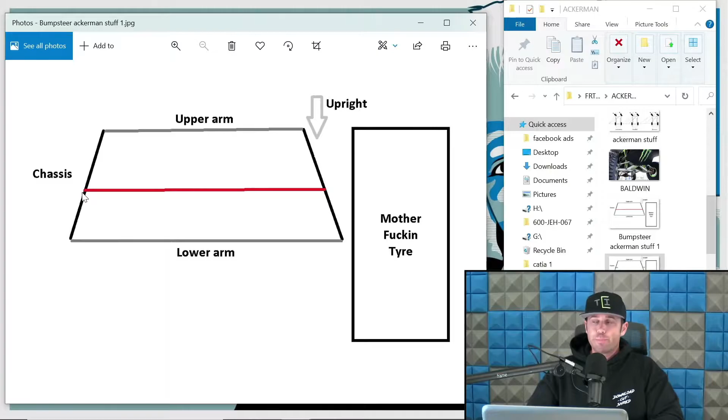So we're looking at the red dots here, which is that right there. That would simulate our steering linkage, steering arm, tie rod arm, whatever you want to call it — the thing with rod ends in it that holds the upright to the steering mechanism, whether it's a rack or swinger system. So right here is it, basically on the inclination and that imaginary line.

That is theoretically the best spot to start if you're doing this by hand, per se, to calculate your bump steer or toe curve mitigation. Yeah, let's use that one, in an appropriate manner relative to your geometry. We're just going to focus on staring at it head on right now. So that's like a good generalized starting point, or initial setup.

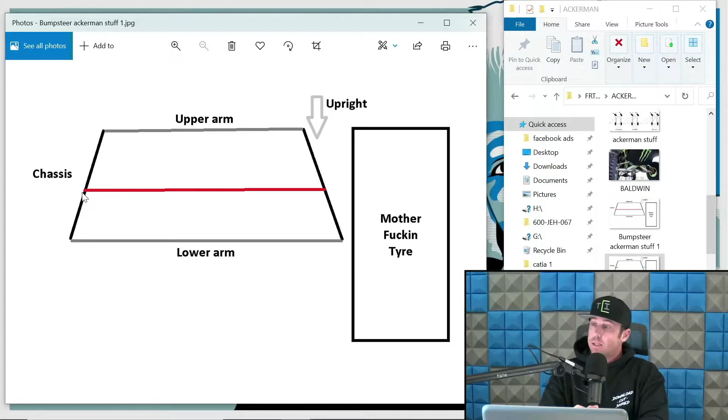And we're going to get more complex than this, so let's dive in. Let's dive into Ackerman. I've mentioned this before, and it's one of those things misunderstood by some, not fully understood — there's a lot of talk about Ackerman with some very opinionated metrics, and also a lot of debate in off-road as to whether it even matters to some degree. I'll tell you my thoughts on it here in a moment, but let's review what Ackerman is.

I found this diagram online, I don't know where the fuck it came from. I thought it had a stamp on it so I could give them credit, but it doesn't. So let's just say that I made this — you know, fucking plagiarizing.

But we're going to call this — well, in off-road, I like to think of this a little different than road racing, etc., because it's not fair to apply the same sort of calculations and predictions with Ackerman that would be in a road car relative to off-road. I don't think that's a fair comparison for two reasons.

One, we have like 10 times the travel of a road race car. So right out of the gate, as soon as you start moving this shit around, everything gets fucked up — all of it. So there's a reason why it's hard to have predictable calculations as you would in a road race car, per se.

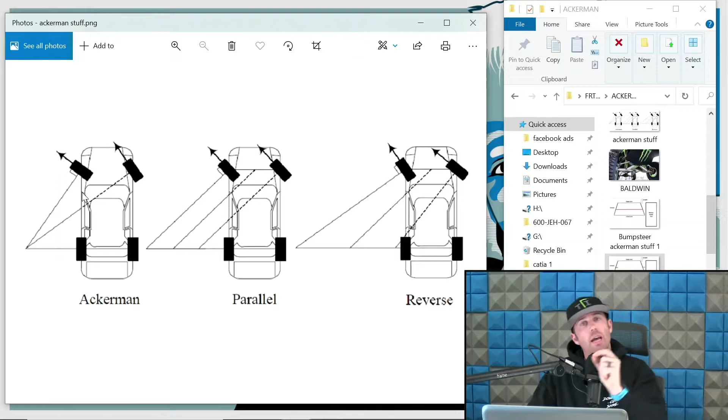And so that's what we have here on the left. If you look closely, that would be what we call Ackerman. Zooming in, look at this.

I am really getting this podcast shit down, bro. I don't even need a Jamie or a Jack. Well, maybe Jack — Jack definitely has to come back for the Ultimaniac episode.

But anyways, so that is a perfect example. That one right there looks like a decent amount of degrees, like 8 or 10 degrees. And so that's what I'm referring to — when I say an Ackerman of 2 degrees, that is the specific metric I'm using.

So now that we got that out of the way, you understand moving forward what I'm getting at when I state specific degrees with Ackerman. It's ride height, full lock, interior tire degree relative to exterior tire degree. It's a good way of noting what it is in an off-road truck, because all the others are so cattywampus anyway, and we'll get into that too.

Now, let's go over what parallel is. I mean, it's exactly what it sounds like — the tires move in parallel.

So the Ackerman at that would be 0 degrees by my definition, or the way I would talk about it with clients. So 0 degrees is that. Simple as fuck. Now let's talk about some real awesome shit.

Reverse Ackerman, or what I will refer to as negative, so to speak, i.e. I am having the outside tire now turn sharper than the interior tire. And there's definitely cases to be made for this. So there's a lot of debate and discussion in this stuff. There's a valid case for some reverse Ackerman in a rear steer type of chassis as well.

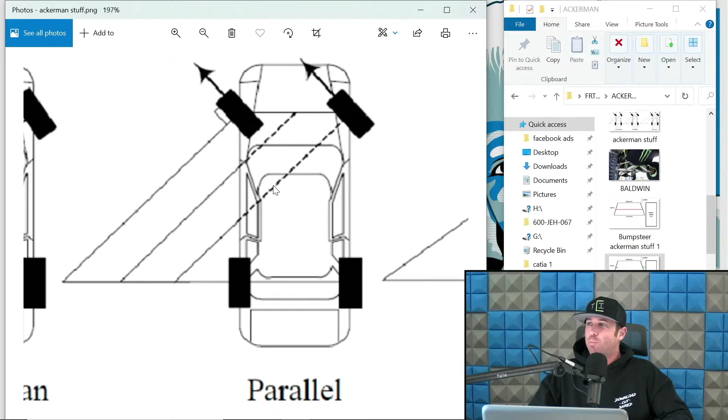And now you're going to start getting into far more advanced stuff than we're going to dive into tonight, primarily because I'm trying to focus on the front end. On the rear end section, when I get to the rear end stuff, we will dive into some of the rear steer based trucks and applications, because there are some, and some guys are very opinionated in that, they fucking hate it. And some guys definitely like it.

So again, different strokes for different folks, but what we can get from this completely stolen diagram is that when I am referring to Ackerman in a specific degree, i.e. if the degree is positive, that means the interior tire is turning faster than the exterior. If it's 0 degrees, I am referring to parallel. And if it's negative, I am referring to reverse Ackerman, which means the outside tire is now turning faster than the inside tire. So those are just a very good way of looking at it, and a good way that I have found about explaining to clients and dealing with clients in this situation.

And most of the guys we deal with, they're not even asking these questions per se. We've definitely had some, and it's more that more experienced guys are usually either concerned with this or just want to know, or they have a recommendation, or they have a specific measure they want us to adhere to. So, yeah, again, it's something cool, and we'll dive into some more. So that right there is the general concept with turning variance and Ackerman.

So now let's talk about building Ackerman into the system. And there's 2 ways to do this that can kind of work in symmetry, or they can fight each other. I kind of touched on this in the Volume 1 episode, and I didn't touch on the other aspect of it. And what that is, so...

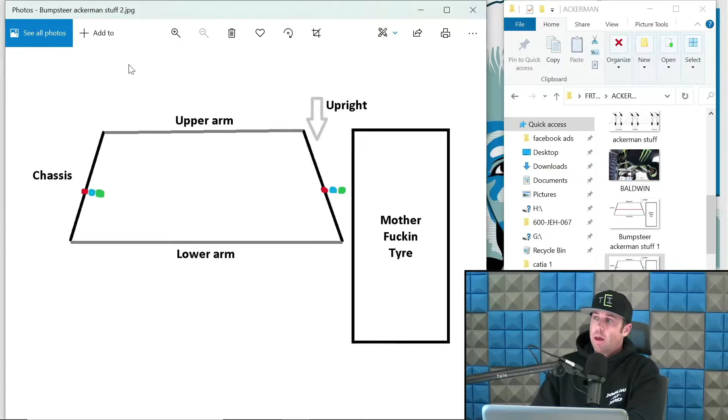So, as I move that point on this guy right here, as I move this point outboard of the inclination angle, looking head on the vehicle, we also have to mimic that on the interior side, or you're going to find that you're going to be forced to mimic that. Otherwise, you're going to start getting that cattywampus toe curve. That shit's going to be fucked. So, as I move further out, we're going to end up with more Ackerman. We're going to end up with steeper degrees of turning in that diagram I showed you. So that is one way for adding Ackerman into the system.

Now, another way would be... let me pull up... start. Here we go. Would be this.

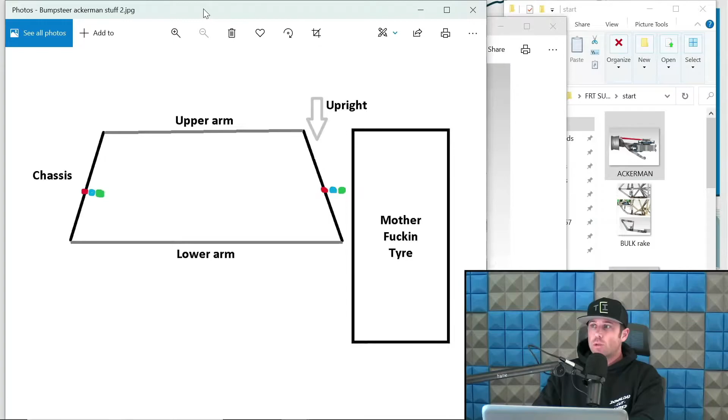Now, there is definitely a lot of debate in what is correct with these three metrics. So let's review some real quick.

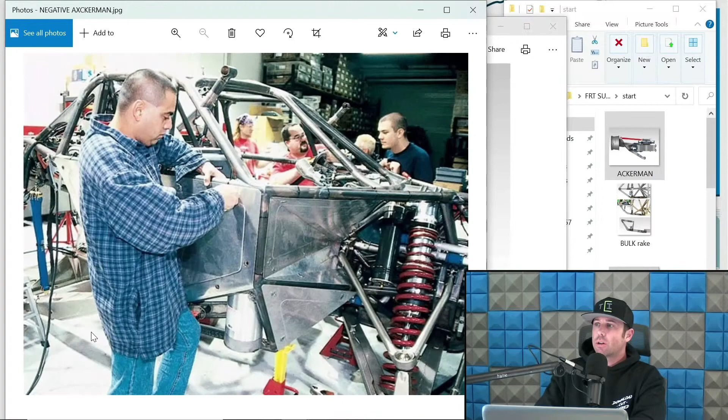This is hard to tell in this one. This is previously, before Robbie cut this truck up and made it into the Unicorn - you can see how far forward the steering rack is in this, and the angle of the steering arm is actually the inverse of what I just showed you in this CAD file. Whoa, that is incorrect, right here. So his rack is basically up in this area of the chassis. We're just reviewing some differences, and then I'll go into what this stuff means in a second.

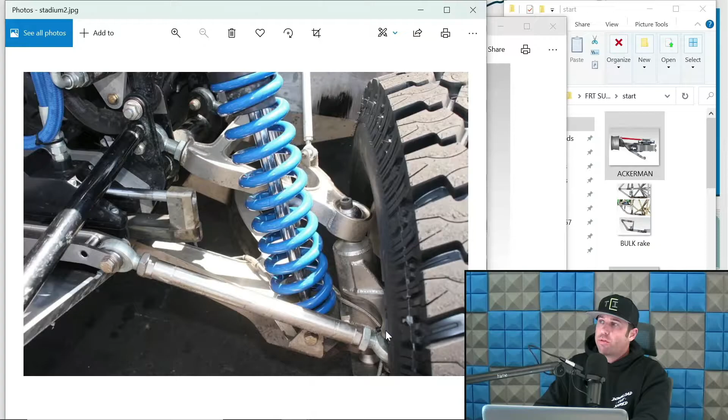This one, again, it is very close to that outside. So it would be fair to assume he's got Ackerman in these SST trucks, a decent amount. So there's just some quick examples on what I'm referring to with the rack placement in the chassis and this upright placement, so you understand these two ways of building Ackerman into the system.

Now, let's review some of the stuff that I prefer, so to speak. For starters, I am not sold on high Ackerman - I do not like it. I think it creates a lot of problems. What I consider high Ackerman is above 5 degrees positive variance.

In other words, if the inside tire is turning more than 5 degrees than the outside tire - this is a personal preference of mine, and that does not mean that if you don't do that, you're wrong. I'm just going off of preference. A lot of the trucks I set up are between 2 and like 4 degrees of positive Ackerman, so they are turning 2 to 4 degrees sharper on the interior tire than the exterior tire. I feel like that is a very good mellow range for the majority of drivers.

The reason I say that is because the application of reverse Ackerman, or parallel to reverse Ackerman range, works better in situations with either more experienced drivers, or trucks that intentionally deploy rear steer with the rear suspension - my thoughts are reverse Ackerman is complemented by a rear steer chassis. I know I'm not alone in that thinking. There are some trucks set up in that fashion. I don't necessarily want to disclose whose, but if you're in the industry and you know, then you know what I'm referring to, and it is definitely more unique in both of those aspects.

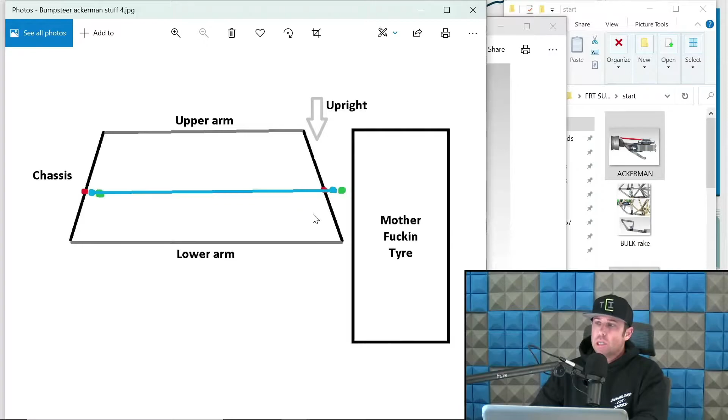And the way I do that is far more closer to the blue line here. I prefer on the upright to be closer to the inclination angle, obviously outside of it, but I usually set stuff up to be a little bit on the closer side of the inclination angle than a lot of other applications that you see. And then what I do is I build Ackerman in with our steering rack location.

So with what I do and how I like to do this, it does create some headaches and some complications. It also creates some positives, and again, there's different strokes for different folks. But let's review an inverse of what I am referring to.

Right here, like Robbie's situation—I don't remember, it's been years since I've seen this truck, and he's cut this thing apart, so I don't know what the unicorn is relative to this. It is all-wheel drive now, so there's going to be their own issues involved with that.

But his rack was very far forward in this truck, and he did mitigate too much reverse Ackerman in that fashion, I believe, by having the upright point relatively further outboard of the inclination angle. So he was somewhat mitigating that in that fashion.

Whereas what I'm doing is kind of the inverse of that. I am sticking a little bit closer to inclination, a little bit more into this blue line range. And then I am also moving the rack rearward to give me some of that Ackerman into the system. The reason I like this is when you start to calculate your toe curve...

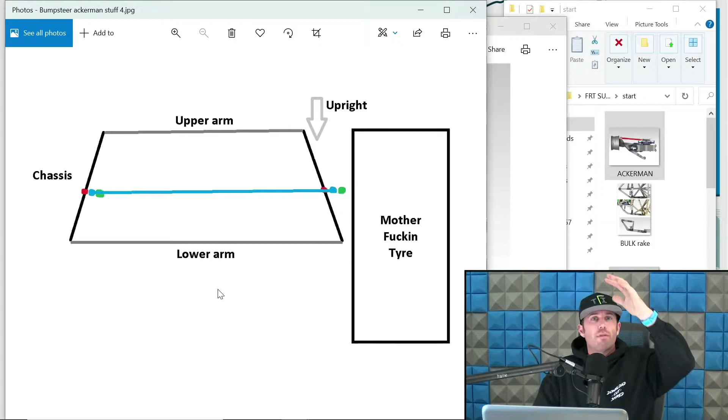Irrelevant of where we set that at compression and ride height, because again, my goal is—those numbers obviously can change per client, i.e. what they set toe at ride height and compression. We can change that, but I never want to go away from wanting that curve to be as smooth as possible. By being a little closer to the inclination angle, we have found that curve is a little less fuckery.

The further out you get, the more fuckery in that curve, unfortunately. So if you're being a stickler about that, you would lean a little closer to the interior in that equation. Now, the other side of the argument is when you go to the outside, like this green line here, the fuckery at the toe curve on like a 40-inch tire, you may not be able to see that with the human eye. You see what I'm getting at?

So the argument can be made that even though there's a lot of guys that put it in this fashion, where they're shoving it very outboard towards the rotor, that doesn't mean it's wrong. I'm just giving you my preference, so to speak, and I've done stuff like this too—quite a few like this too. These are just two kind of ways to get to the same sort of goal.

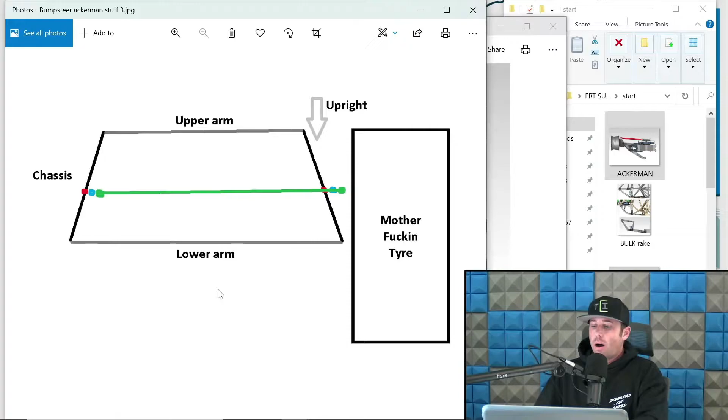So with that, that's kind of a good generalization as to where we're placing those two things to get us either to positive Ackerman or not. If I was going to go parallel or reverse Ackerman, I will bring that steering rack a little more even in the chassis, and even up some of the inclination stuff too, bringing it back to more of a parallel if, say, the client's like, I want zero degrees change. And then for reverse, that's where you would move the rack or the chassis point forward.

You don't really ever want to be interior of the inclination angle. If anything, you just want to be a hair on the exterior—you can come up and hug it, but don't go inside of that. If you want to intentionally build reverse Ackerman, just shove the steering rack pivot location forward in the chassis, and rest assured that'll naturally put your Ackerman either back to zero or you'll start reversing it.

And you can easily just start fucking with that in the computer, by moving this interior point forward, and you'll see it'll cross a line real quick, and then you'll be in reverse Ackerman territory, and then you just decide how much do you want to go in that equation.

Again, like I'm saying, I am not a skilled enough driver to tell you that reverse Ackerman is going to make me win a race relative to having some Ackerman will make me win a race. I'm not that guy, and I never claim to be that guy. But I can tell you what to do if that's what you want. These are the methods we deploy to put reverse Ackerman into a system or to put Ackerman into a system.

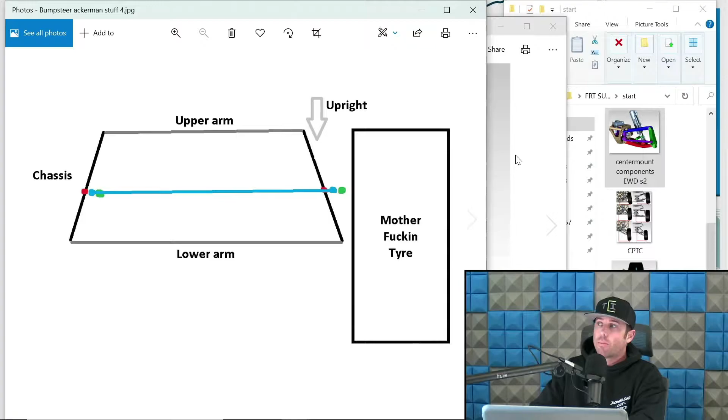Now, let's go over some positives with doing it the way I prefer, so to speak. One, I feel like the toe curve is a little smoother. So keep in mind, I am a little closer to the blue dot here than the green dot. And that is like this line right here.

Two, this rack comes rearward into the chassis. We get a little bit better approach clearance. I don't want to say approach angle. I mean, it's kind of like an approach angle per se, but I just like to say clearance because you're typically roughing stuff up - sand, dirt, mud, whatever you're going through at the time. Maybe you can gain 1 inch or 2 of clearance in that very forward leading edge. So again, there's a positive right there.

Now let's talk some of the negatives, so to speak, in this situation. Because you can't just fucking, like I've said before, you can't just willy-nilly shove that fucker back indiscriminately. One, you're going to get to a point where the Ackerman is just fucking out of control. Oh, and let's review that too real quick before we move forward.

Like I was saying, most of the stuff I set up for most drivers is going to be between 2, maybe 5 degrees on the high side of Ackerman. In other words, the interior tire is turning at full lock and ride height between 2 to 5 degrees faster than the exterior. With my experience, I feel like the majority of drivers feel comfortable in that range.

Now, I am not a fan of higher Ackerman numbers. I have done higher Ackerman numbers, but I am not a big fan of that for a few reasons. One, I feel like that literally only complements stuff at lower turning speeds, and it can cause some unpleasantries at speed in these big trucks.

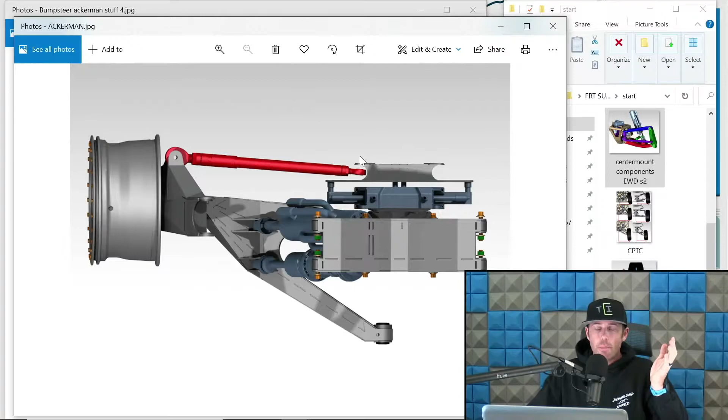One is you only have so much that you can turn in these trucks, especially if you have vertical bearings for your uprights. Now, if you have horizontal bearings for the uprights, you will have a little bit more turning capacity, but you're still not going to be like a drift car where you have 74 fucking degrees. You're going to be in like the 30s to mid-high 30s range with horizontal bearings, depending on who you talk to and how they set it up. And for the vertical bearings, you're going to be in like the low 30 range.

So with that said, you have to keep in mind there is a limit. Unlike, for example, the Departy truck we did, I did 74 degrees of turning on the interior tire. A fuckload. We're never going to see that in off-road. That's just not going to happen. So you have a limit on that interior tire turning. So if you start building a fuckload of Ackerman into your system, for obvious reasons, let's go.

For obvious reasons, a ton of it, this exterior tire is going to come short. So if you max this side out with a fuckload of Ackerman, you may only be maxing out that exterior tire like 18 degrees. Imagine coming into a turn at 18.

You're going to start pushing. That truck's going to push pretty bad because all your weight is now shifting on the exterior tire, which has a really low number, relatively speaking, if you're maxing it out. Now, this is obviously not going to happen all the time, this is going to be in more of select times. But the point being is you have to always pay attention to the fact that you have a maximum. You're not like a fucking drift guy, you don't have 70-something degrees to work with. So that max could easily over-restrict that outside tire too much if you put too much Ackerman into the system.

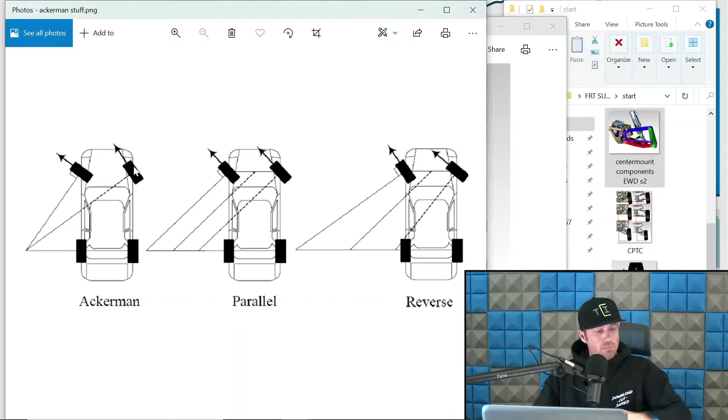So yeah, so there's that. Now let's go back to, in the rear wheel drive truck rack placement and chassis, the negatives. So that rant is over.

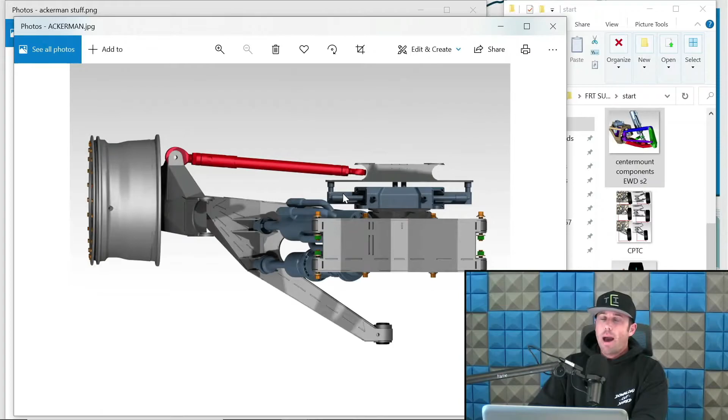So the negatives here, they're going to be very obvious right off the bat. First and foremost, you will notice the lower arm pivot, although covered by the upright, is significantly farther forward than the pivot on the chassis. So this creates a situation where we have to dive this arm forward. What that means is this rack, you have to make sure it clears at compression this arm. So you got to watch for that. At full compression and full lock, you got to make sure this rack does not touch your arm. Otherwise, you're going to have a bad fucking day.

And the inverse side of the table, at full lock and full extension, you have to check the upper arm. Let me pull, let's see, rear wheel drive front end. Let me pull an example just so that... cool. So when this guy's at full lock, this upper arm at extension has to clear.

This cutout right here is basically for that. And this lower arm is straight coming off of this guy and then kicks forward, and he kicks after this guy is at full lock and compression, so it clears. So there's one of the things that you got to watch for when you're doing a steering rack setup in a truck like this, when you are doing it in my style, which is placing the rack rearward in the chassis to build some Ackerman into the system, because I like to keep the pivot on the upright a little closer to the inclination angle. Make sense? So those are things you got to watch for.

Now, additionally, you also need to watch for steering with shocks. So this guy's going to want to come out to about here because he's got 3 inches of throw. And at full extension, you got to make sure this bypass, or if your coilover's up front, doesn't tap that guy. So again, this just comes back to always double fucking, triple fucking, quadruple checking everything. Move that thing in the computer a million fucking times. Trust me, the more you do that, not only will you understand how things move better, but it's a fuckload easier to change in the computer than to get a phone call after everything is going on the truck and something's hitting.

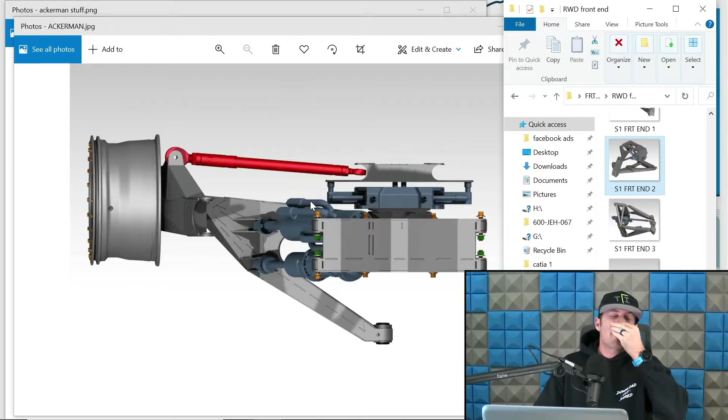I like to always have a good chunk of clearance too. So if I'm like an eighth inch from the steering rack, I feel like that's too close. You kind of want to always be like a quarter, three-eighths minimum clearance, because shit moves in real life, so you don't want to assume the fabricators are going to be perfect at the end of the day relative to what I have here in the computer.

So you got to build some variance in there for fuckery, tolerance stacking, weld movement, all that, so if the chassis doesn't quite line up to where this shock mount ends up, a little bit further forward by 60 thousandths, and this rack spot is just a hair offset too, but I already have three-eighths of an inch of coverage in the computer.

So at the end of the day, it becomes like 0.15 or 0.18 or 3/16 clearance. Okay, cool, we still cleared, but I mitigated that by making sure I'm a little bit on the conservative side with my clearances.

And that's something you definitely have to look for when it comes to moving that rack rearward. Now, swingers, it's way easier to mitigate, let me see if I can find one of my swinger setups real quick. The swingers just don't take up as much room in this chunk of the chassis, because you have to remember, here's my pivot - look at how deep the rack is.

That right there is a good chunk. The swingers are going to be up here, so typically with swingers you get a lot more clearance. So with the swinger system, you can mount the shocks further forward in the chassis. You can make the upper arm a little bit more swoopy. So you can get away with some stuff like that.

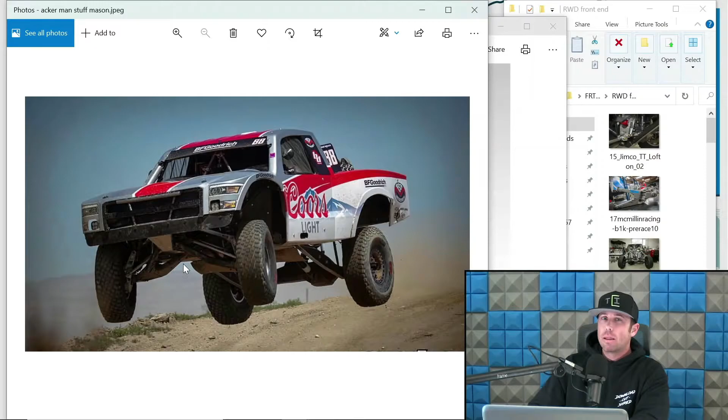And also judging by what I saw with this right here and what I know about the differentials and swingers, clearance issues would lead me to believe they're in that range per se. The problem with all-wheel drive really stems from the fact that you have this fucking gear set in your way. So unlike the rear-wheel drive trucks, obviously I can shove this rack rearward and I don't have this gear set here just fucking sitting there.

On the all-wheel drive setups, let's see here, non-portal front end.

So we have this gear set here, the front differential, that's in the way, which means the steering rack gets shoved forward. That point gets shoved forward, typically speaking. So it's really hard to have this point rearward in the chassis to utilize that tactic and deploy that method for gaining Ackerman into the system, if that's something you want.

Again, I do stress that - there are guys that do not want Ackerman at all. They want reverse Ackerman, to be crystal clear. And so that right there is one of the headaches that you have to mitigate.

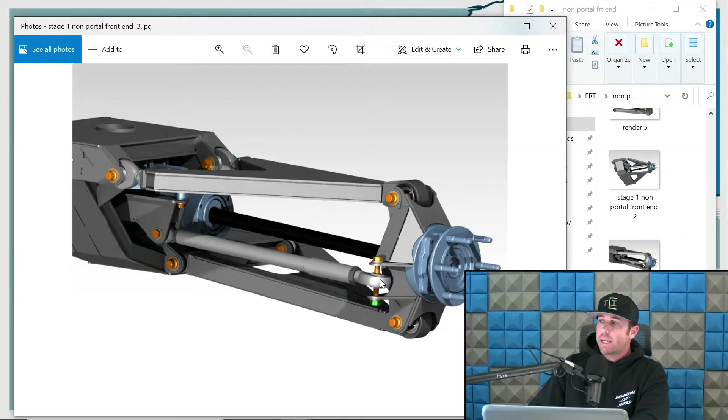Now, you can also say, to be fair, why can't I just take this point and shove it really far off the upright? Well, you can move it outboard, away from the upright, or forward in the chassis, but you're going to find that now you're really messing with your turning radius, the maximum amount you're able to turn, because that leverage arm and your rack stroke or swinger throw is going to be the determining factor for how much max turn you can have.

So it's not like I can just willy-nilly put my rack and then move it where I want. No, you're going to find that you're going to mess yourself up pretty bad if you're not paying attention to that leverage ratio as well. So you've got to make sure you get that dialed in too, and I'll go into a little more detail on that.

So all-wheel drive, front diff. Okay, so here's the other thing too. With the diff placement on the all-wheel drives, what you're really fighting - here's the other bit to that. Let me get that guy open. That's not the all-wheel drive. God damn it.

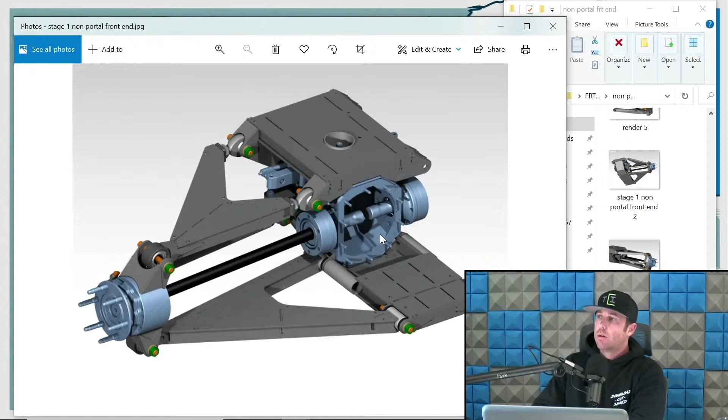Here we go. So what you might be thinking to yourself is, well, if I want to get this steering point in the chassis rearward, why don't we just move the differential rearward? Genius, right? I've got it now - I'm going to add Ackerman. You know what I'm going to do? We're just going to move that diff rearward. Now I can do the same thing you were just talking about with the rack. Boom, done. Well, no - you're going to get screwed real quick.

That differential center point cannot just indiscriminately move rearward in the chassis without completely messing up, primarily speaking, the extension travel characteristics and numbers. Because when it comes to all-wheel drives, especially non-portal all-wheel drives but also portal all-wheel drives, the extension travel and full lock, down and out, is where you're going to see the most extreme CV angles. You need to mitigate that as best you can. By moving that differential rearward, you're just adding to that extremity - you're not mitigating that angle, you're making it worse.

So you're either going to have to do one of two things. If you start moving that differential rearward more than like a half inch, what you're going to find is that at extension and at lock, you're going to either have to reduce your turning radius and wheel travel, or you need to put the differential back in a more complementary position. So again, you can't just start moving shit around thinking you're going to mitigate one scenario by doing this - every single thing you touch is going to change something else. And that can have disastrous results, or it can have mediocre results, i.e. it's a trade-off. I'm okay with X, Y, or Z to gain this.

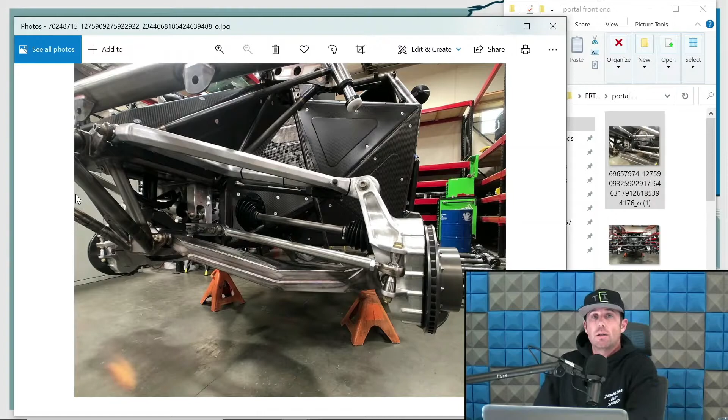But yeah, so here's the towers one, and it's hard to tell, but this is the steering point. It's tucked into this little corner. So I did the best I could to get a good number in there for our client and the direction he wants to go in. I don't want to disclose the specifics on this, but I can tell you it is definitely not high Ackerman or mid-range Ackerman. He's on the lower side, maybe, but we have it in a specific spot.

And this swinger setup is designed also in a fashion to create a very good Ackerman, so to speak, when you're in rough stuff through a turn. One side's compressed and one side is extended. If you understand where I'm going with that, you're getting into something and the truck's like that. With the swinger geometry, you can make those two things complement each other really well, which you can't do with a rack. So there's a trade-off that we're about to go through as well.

But my point being, you can look closely, this is where the steering mounts on the other side, this is just the passenger side. It's tucked into this little corner, so to speak, to get me as far rearward in the chassis as possible without moving that differential and messing up the other aspects you don't want to mess up, like extension and lock on that CV. I talked about the torque steer with that.

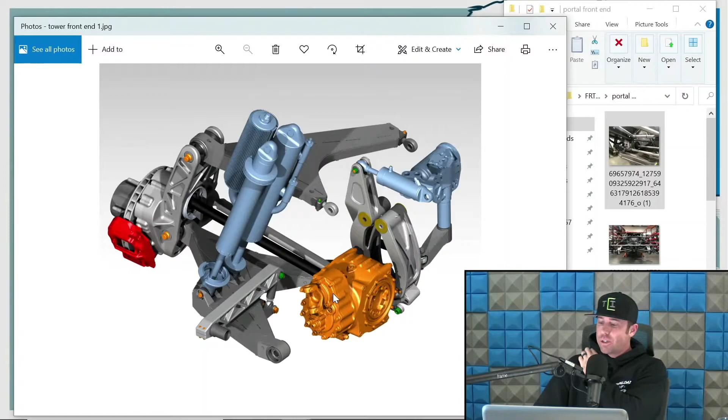Oh, long travel kits and Ackerman, okay, it's fucked, it's that simple. In the long travel stuff, like I mentioned last episode, wheelbase changes and stuff like that tend to mess with you in that aspect.

Because I'm going to use Blitzkrieg again, I've been boys with Nate for a long time, I know I keep using him as an example. He makes a lot of good kits, dude, so credit where credit is due. I'm trying to think when Blitzkrieg started, like 2003 or maybe 99 range. Nate, if you see this, text me and let me know. He's a little older than me, to be fair, but he's been doing this a long time, and he's had a ton of guys with kits, like decades on kits.

So again, just one of many manufacturers. You also have, you know, HM is another older manufacturer, Kevin's been around for just as long as Nate, if not maybe longer. Camburg has been around for just as long as Nate, if not longer. Missoula is newer, so to speak, than Blitzkrieg, but he's kind of getting old too.

I mean, he's like my age now. So Chris is definitely in the older crowd to some degree. On the younger side would be like Izzy Fabrication, he's a little bit younger. Ryan Kibb, I think he's a little younger than me, I'll have to ask him, but I'm pretty sure he's younger. I don't think he's older than I am, so he's like mid-range on the oldness scale.

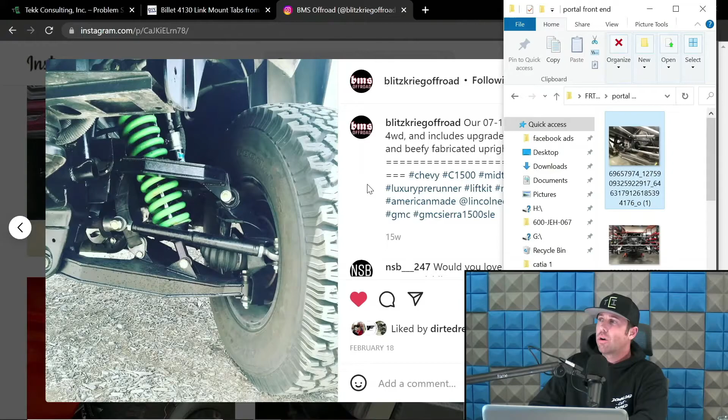See, 16 inches, that is -- see, Nate does a good job of this. 16 inches, you might be like, oh, that ain't shit. Like, my boy over here gets 20 inches in his long travel kit, blah, blah. Nah, fuck your boy. 16 inches of usable wheel travel in a four-wheel drive truck like this is rad, dude. These things actually do work pretty well.

Nate did a great job of these, and they do use stock pivots. So this is about as optimized as you're going to get using stock pivots for an all-wheel drive truck. You're really not going to optimize anymore. I bet you if I just went from a blank slate and started drawing something in the computer, and then I gave Nate that CAD file, he'll be like, this is pretty fucking close. Because we're going to be optimizing in the same generalities.

And I would be fine with 16 inches of usable as well, which leads me to believe that we're going to end up in very similar circumstances, because I would be, again, stock pivots, stock stuff on the wheel and tire, and mitigation with the camber curve relative to the inclination. You can tell he's mitigating that some by opening up that scrub. I talked about that last time. And we would still have to mitigate the same steering, i.e. that pivot on the interior doesn't change for Nate or I. So the exterior is what we got to fuck with. You see what I'm getting at? By default, we're going to still probably end up super close by just going off of those generalities, and bringing us back to that side of the table.

So on the rear-wheel drive or non-all-wheel-drive long travel stuff, you can move that upright more typically, and you'll start to induce more Ackerman into that system.

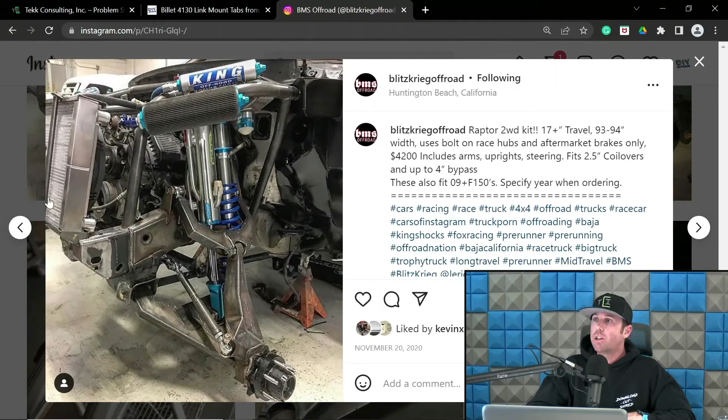So that's a good job, Nate. This is actually not far off of what HM's new stuff is too, which I helped Kevin with - the newer generation of HM stuff that he's just now getting to market. But anyways...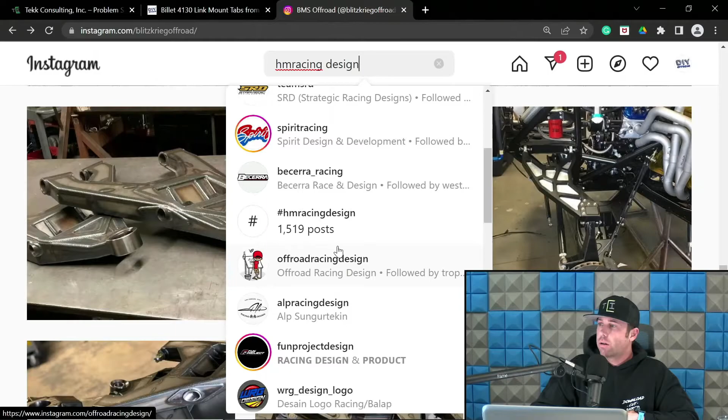Here's another example of Nate's stuff. I think Kevin is on HM Racing Design - he just had his Instagram get hacked, so he had to put up a new one. Let's see if he has any of the new Raptor stuff. There's one of the new arms for one of his Raptor kits - the more mellow one. Here's some of his other Raptor kits. Here's one right here - the Elite two-wheel drive setup.

Yeah, and this is that similar range. I don't think this was going above 18, if I remember correctly. It's right in that range, and this is right at about a 94-inch track width as well. So again, just back to what I was saying, these are some of those generalities.

So let's go back to steering racks and steering rack setups. Where are we at on time? Jesus Christ, an hour and 20. I need to hurry up.

And I feel like I'm still intentionally missing stuff too. Okay, so let's bring this up.

So these are steering racks right here. Sorry, my wife is messaging me - just wanted to make sure it's not an emergency or any bullshit I've got to jump off this to deal with. You might be able to still hear the toddler yelling in the background.

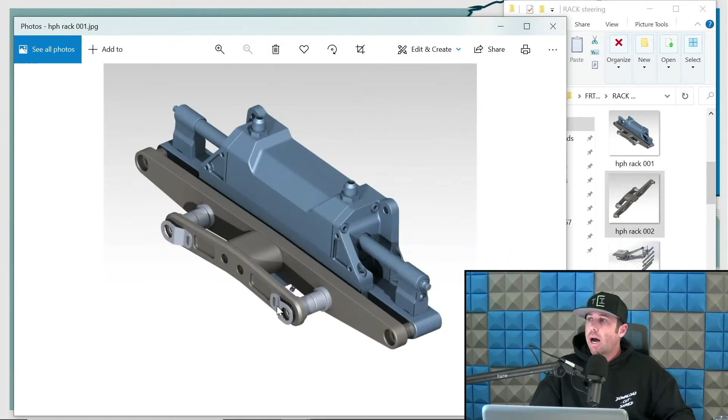So keep that in mind - those three things are what you're manipulating when it comes to placing it on the steering rack. And I already mentioned the height in the chassis is a big deal because that can fuck you up. The height is important for two reasons: one, you obviously need clearance on your lower arm and clearance on the upper arm. The other reason is, I prefer to keep these pivots as centered on the rack main bar as possible, so you don't have it too far offset below or above. Now you can get away with a little bit of offset, a quarter inch there, half inch there - like this one I think is like a quarter inch.

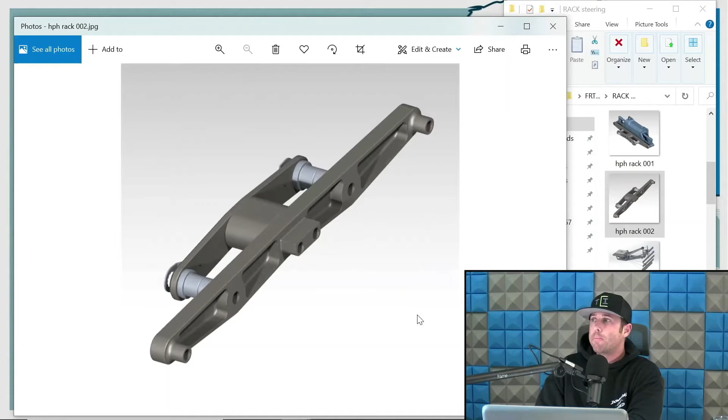And stuff like that is fine. We'll get into this in a second. So there is, and I'll get into what these are specifically later in the construction section.

But let's focus on those three measurements. Forward-aft would be Ackerman. Height in the chassis, up and down so to speak, and width in the chassis are going to be our toe curve mitigation tactics. And like I showed you in that previous image, this is the width in the chassis and the height, so to speak, and you're going to match that to some degree. So these are kind of some generalities of what we're looking for in that rack deal.

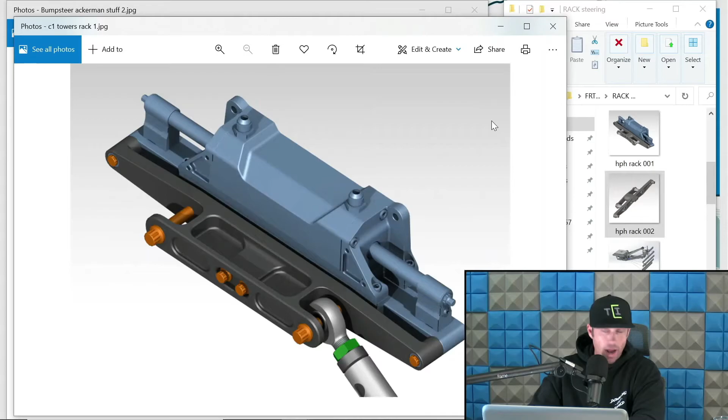Now, where was I going with this? Oh yeah, the offset. So the offset, again, like I was saying, you can offset it down a hair, you can offset it up a hair. Typically I avoid offsetting it up. I usually only end up offsetting it down, naturally speaking, because my preference, to be crystal clear, is to have the location for the steering to be as low as possible on the upright.

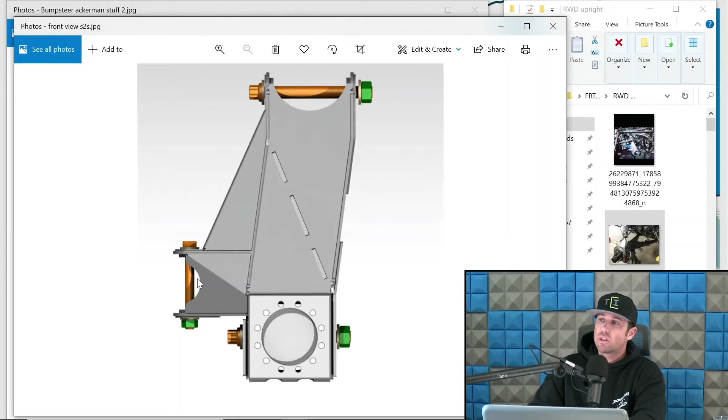Now you'll note this one is higher. You'll notice there's a weird caveat with steering rack trucks versus swinger trucks. This is a swinger upright for one of our DIY setups. That location is significantly lower in the upright. This one is a steering rack setup. It is higher on the upright.

Let's see if I can find anything else. I don't remember what Armada is running in this, to be perfectly honest. That is relatively low, so I don't remember, I'd have to ask Igor on that. This one is a rack-based setup, so he's a little higher on the upright.

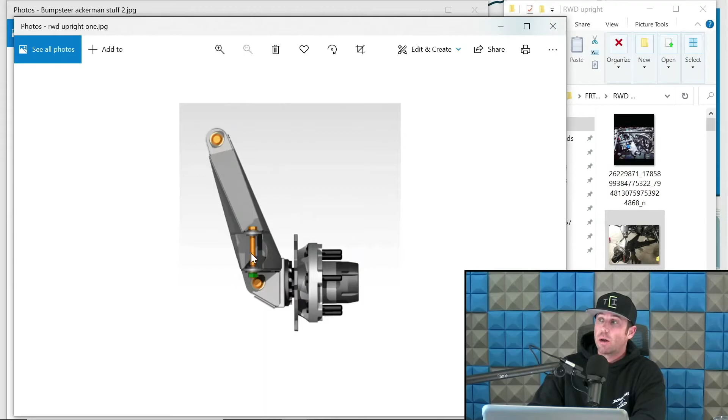A rack-based setup, so it's higher on the upright. Rack-based setup, rack-based setup. Steering swinger setup, so a little bit lower on the upright.

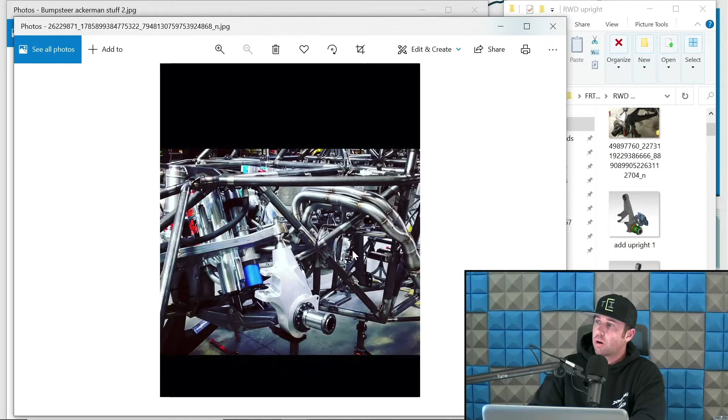Let's look at, man, there's a ton of uprights in here. Let's go back to the top, see some other examples that aren't mine. Again, Mason, a little higher on the upright, rack-based.

So the reason you typically see the rack-based stuff higher on the upright is because the rack has to be a little higher in the chassis, thus making that pivot for the rack a little higher in the chassis. And if you don't offset it a ton in the rack adapter, you are inherently going to have a higher point on the upright. So naturally speaking, that's why you see the rack-based uprights typically have a steering point higher up on the upright.

Now, you want it lower on the upright. In theory, you want it as close as you can to wheel center line, but you're not going to be able to do that in the perfect world with off-road, so we do the best we can.

These racks are pretty fucking stout, generally speaking, so even with it high in the upright, like this is a Mason truck, or like a bunch of this shit we've done, this is a Pro-Am based upright. It's not a Pro-Am upright, I'm sorry, it's an upright that was designed for a Pro-Am rack.

This one too. There's an ID one, Dave ID. This one was for exterior swingers. This one is for a PSS rack.

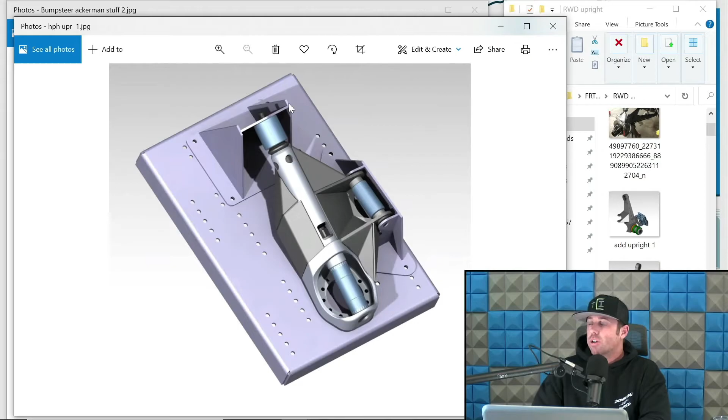So inherently speaking, what happens is the rack point ends up higher because we want to put that as centered on that rack main bar, so to speak, or the main slider as best we can. So that will inherently put us higher on the upright. Whereas the steering swingers, we can tuck those motherfuckers down and get much lower on the upright for a better leverage ratio, or better use of the energy expenditure by the steering linkage, if that makes sense. So those are two inherent things that happen with rack placement versus steering swinger placement. That's one of those natural things that dictates that location on the upright in the rack-based trucks.

Okay, so keep going. Depth in chassis, height in chassis, yeah I went over that. The height in the chassis, lower arm compression can be an issue, so you always got to watch this bad boy.

Location on the upright, height and distance from the upright, leverage ratio. So yeah, we went through the height on the upright. Let's talk that leverage ratio for the steering arm, let's talk this depth again, and I did hint on that earlier. So like I was saying, you got to be careful with this fucker too. So what you want to do is, your client, oh here's a perfect example, let me see if I can find it.

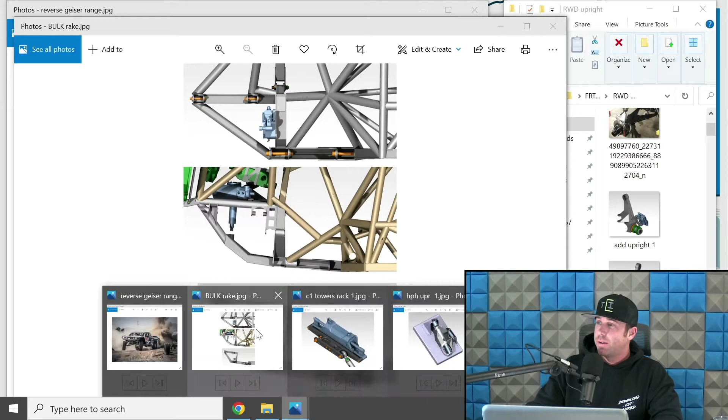You may have clients that are specific with what they want their turning ratio, or turning lock, to be at ride height, that's typically what they're referring to, or that's what I like to use.

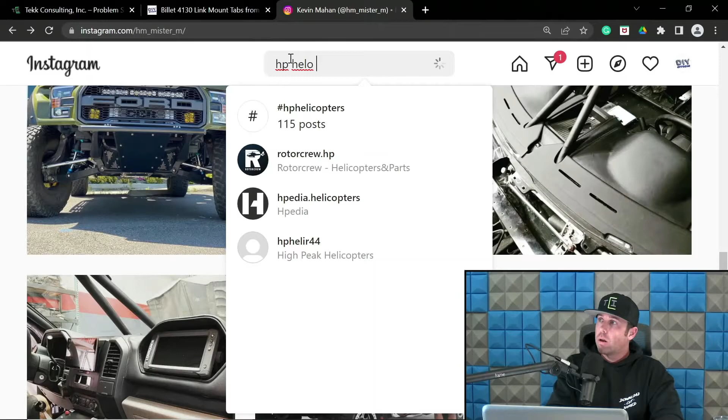HP, high performance, HP heli, HP heli guys. Bear with me one second, I need to find this because now it's going to piss me off if I don't find it, just give me a second. So there we go. Oh son of a bitch, they're not tagged in this, I'm trying to find their page. HP High Peak Helicopters. There we go, this is what I was trying to find. Thank you for the patience.

So let's see if we can find my example. This truck right here has an older stage 2 DIY setup on the front. It's vertical bearings, so the steering is a little bit less than what we'd do with horizontal bearings, and I'll get to that section in a bit. But the point is I just redesigned their front end of their trophy truck, and the front end of their trophy truck will now also bolt on to the front end of this truck, so they can add to that.

And in doing so, we changed the steering leverage arm ratio to gain some turn at ride height. So let's pull that up.

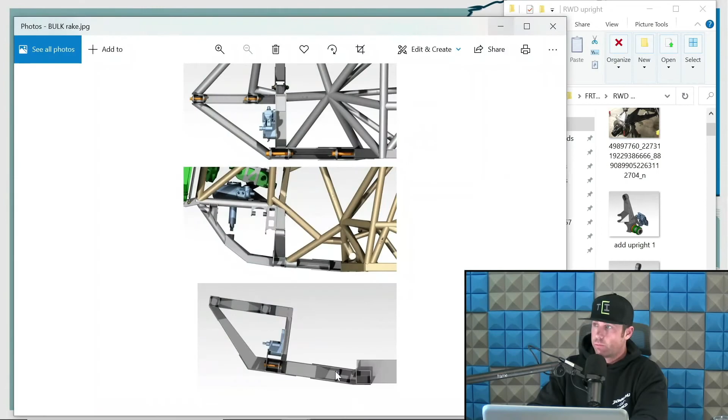What we did is, because it was a vertical bearing setup, in fact very similar to this kit right here, we only have so much I can turn here before that bearing seizes. And at extension and lock, that's typically where you find the biggest problem. But my point being is you're going to have a limit there, and that limit is going to dictate what this length can max out at relative to your stroke.

So on the PSS rack that has a 6 inch stroke, that gives us 3 inches on this driver's side. That means I can do the calculations to where this arm right here, so to speak, from center, we can make this distance optimized so that this bearing only ever so slightly gets just a hair below max, like 2 degrees below max, at that 3 inches of throw. So we're maximizing that bearing articulation.

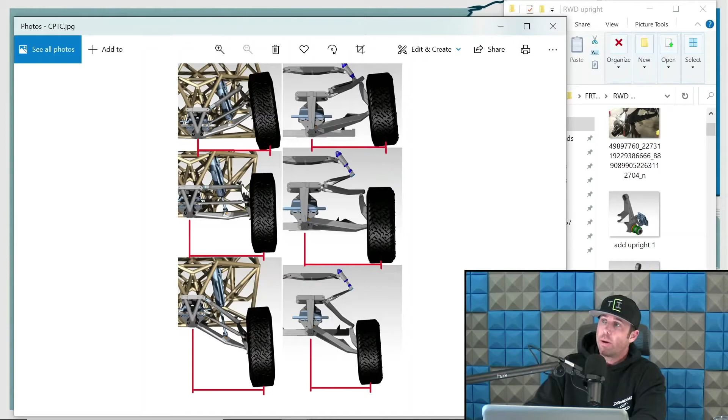Now in a horizontal bearing setup, let's see if I have one pictured in this pack. Here's a horizontal bearing, these are both horizontal bearing setups. The bearings are in a different direction, so they can turn almost 360 in theory. So they're not limited by what I was just referring to.

So with that said, on the new front end that's going on those guys' trophy truck, it's an older truck that they just cut the front end off and they're putting a new one on. They specifically wanted me to add about 5 or 6 degrees of turn to full lock. And in doing so, we didn't change the rack, so it's still a Power Steering Solutions rack, and it's still the same throw. What we changed is this leverage arm ratio.

This arm became shorter, so with the horizontal bearing up here, I'm not limited by that. So we were able to push this to like 36 degrees, I don't remember the specific number, I'd have to go pull that up. But the point being is we added 5 or 6 degrees to it versus the vertical bearing setup by changing the length of that leverage arm.

And in doing so, we also pull some Ackermann out of the system. That's inherent to how that works, because now this point is moving rearward in the chassis relative to this point, so it kind of does the same thing. Now you can mitigate that by moving it more outboard and things along those lines. So for obvious reasons, that was part of the stuff I was just referring to.

But what we want to focus on with this right now is that leverage ratio on the arm, these steering tabs on the arm, this length has a few things that you can play with. And they all are very specific to the throw of the rack and the degrees of turn that you want or are allowed to have.

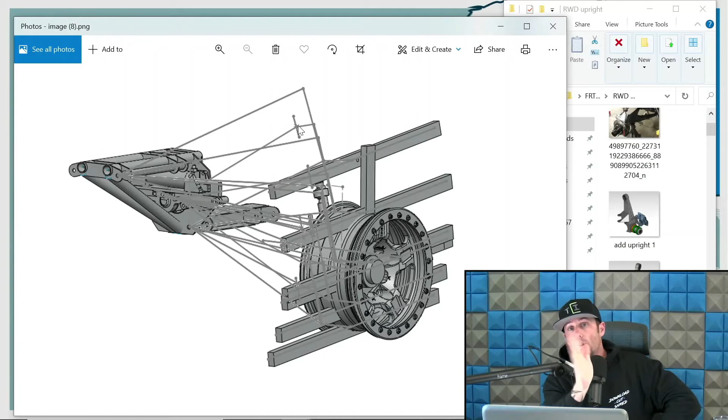Then we go in, and what you're seeing here is we're plugging in this little star point bullshit right here, which is our toe curve. So we're plugging that in, and what the computer then does is it optimizes that steering point. We set that steering point within the chassis, we set this leverage ratio on the arm so we understand our steering lock on that, and we also set the height - in other words, I want him centered on the rack. Then the computer optimizes the open variable, so to speak - it'll optimize the height of this guy, how far outboard he is of inclination, and the width of this guy in the chassis, and obviously the length of our deal.

So we'll take this computer simulation, so to speak, and dictate - here's another one, this one's an all-wheel drive one - and I'll dictate here's the toe curve I want, and here's where I want it set at ride height, the toe, and compression, and stuff like that. Then the computer will quackulate that interior point relative to those open dimensions, and gets us basically spot fucking on with very little work to some degree.

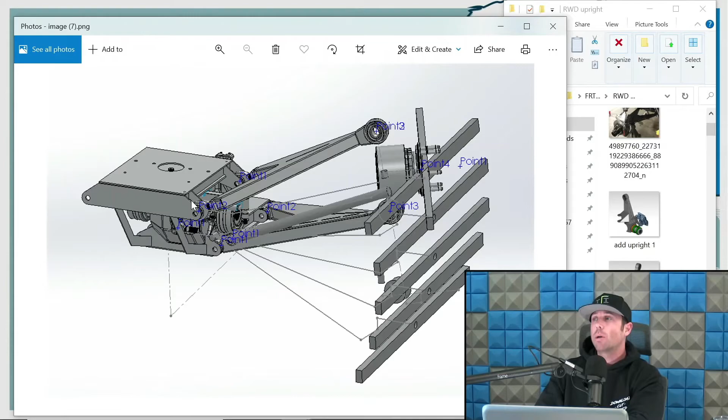Also, we've done so many of these that it's not difficult to map that. This is just a top view of it mapping - you can see it moving through travel. This is what I was referring to earlier about taking the leading edge. So these are all the points of the leading edge of the tire relative to the trailing edge of the tire. That's right there is how we're measuring.

So again, total fucking cheating, huh? The best way to do this by hand, or if I was going to start the old-fashioned way, is I'm going to go back to what I was referencing before with this. I'm going to go back to this guy, start here, maybe move him out a little bit, see where my Ackerman is, make sure your leverage ratio on the upright is correct for your turning radius relative to your rack throw, and then I'm going to start cycling it.

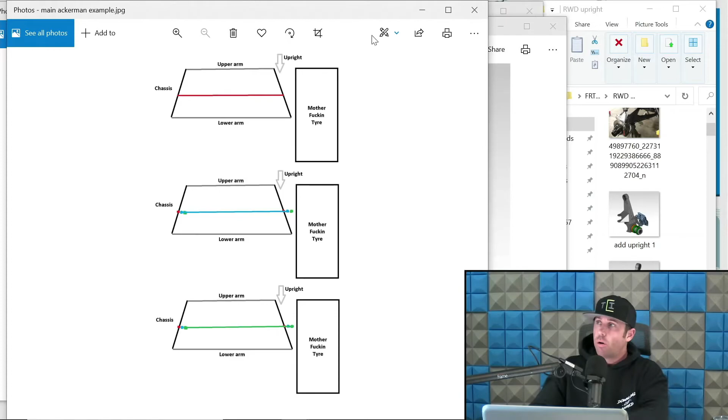So I'm going to do this at ride height first to dial in the leverage ratio on the upright, so our turning lock relative to throw on the steering system, whether it's a rack or not. We'll do that at ride height, get our Ackerman figured out, how I like that or not. Then I'll start cycling it, and manipulating the points through cycle, like the interior and exterior, to dial in my toe curve. And that just takes a lot of time. So what we've done at Tekk is we have our own sort of sketch programs in SolidWorks that help us do this a lot faster.

So I am, in essence, cheating, to be frank. And this is only looking at it in a rack scenario, forward on, so to speak. Now in this one, it's done through turn as well - that's where you're seeing this guy right here pop up. So all these flat ones are straight on, and this one will be through turn. You can do the same thing through turn as well with a rack, it's just you don't want to. Here's my opinion per se: in the rack scenario, you're going to maximize this sort of forward-looking or straight toe curve as best you can, and then just check the in-turn one.

But the in-turn toe is not going to be great. There's no way. You don't have enough degrees of freedom in a steering rack assembly to mitigate that because it moves in a linear fashion. You're never going to have the greatest in-turn toe mitigation, it's just not going to happen. So keep that in mind so you don't pull your hair out thinking you're fucked up or an idiot. No, it is what it is. Even the big boy trucks you see running steering racks have this. It's just inherent because it's a linear movement, not an arc movement like swingers are an arc movement.

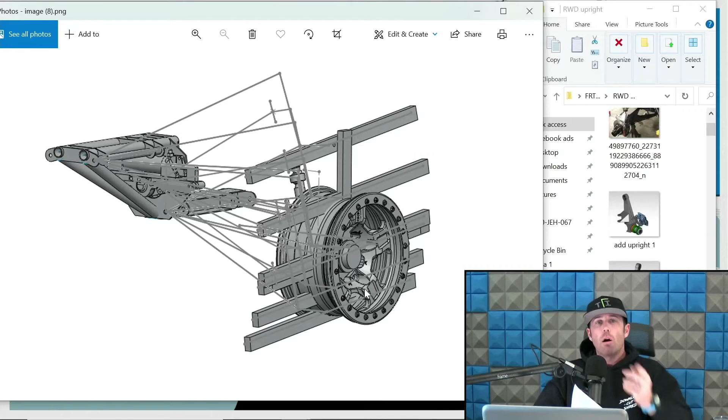And then for stock stuff, well, you're kind of fucked. There isn't really a great replacement stock rack in a lot of these vehicles. There are guys doing it - like Blitzkrieg has done swing set steering for Silverados, Izzy Fab has done swing set steering for Silverados, I actually helped them with that. Ryan Kibb has done swing set steering for Silverados too, but we're going to get into that. So they're not really doing replacement racks, although Izzy Fab has a rack mitigation deal where they're supplementing the rack casing strength-wise and robustness. But you're not going to Howe or Power Steering Solutions or Pro-Am and buying a rack that you'd put in a Silverado long travel truck or a Raptor, so to speak. You're basically using the stock stuff for the most part. I'm sure you could find someone that has done that, to be fair.

Now let's move on to steering box fuckery. The cool thing with steering boxes is it gives designers like me more degrees of freedom to fuck with, and I hate it - it's a love-hate relationship. I used to be scared as fuck with it, years ago, and I would basically only tell clients to run racks, I didn't want to design a steering swinger setup because I knew it was just going to be far more complex. Now that I've done it a bunch of times, I don't think it's nearly as complex, obviously with more experience that natural feeling comes into place. But the reality is it definitely is more complex, and there's a lot of cool shit you can do, which is even more rad once you start to understand how it works and how it moves. I get excited because you start to dive into changing so much different cool stuff through the steering rack stuff - I fucking love it. So just like everything we do here at Tekk, we try to find the laziest way we can do it, and we create these sort of programs.

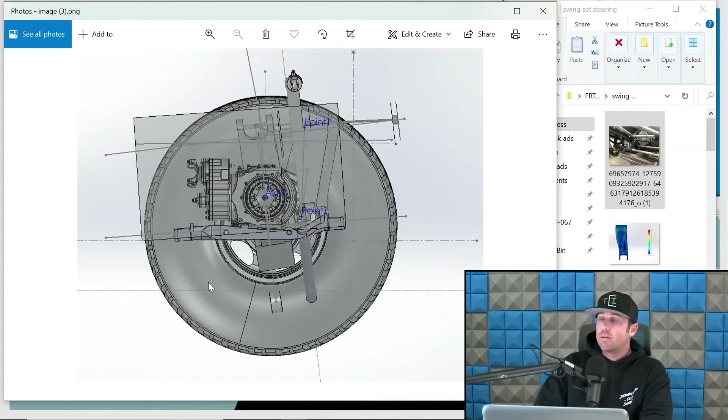That's just one of those things where you just have to start going through it and do it. Here's another one, it's a non-all-wheel drive one - this is a rear-wheel drive one where we're mapping out all the locations through the toe curve, optimizing that point. Steering swingers do not move in a linear fashion, and that's the best part about this - you can really open up that degree of freedom.

The swingers obviously swing. They create an arc, and that arc is what you utilize to take the in-turn bump steer out of the equation. So let me give you a little bit of a glimpse into that cycle steering. Here we go.

So when I set this stuff up, we're going this route where I am dictating in the computer my toe curve, in-turn, and everything like that. Like this one is actually doing it through turn right now.

This one is doing it head-on. Like I said, it's cheating - I'm getting it to optimize the point for me to get me to the specific toe curve I want, or as close to that specific toe curve as I want. Because they may not be perfect, but we'll get it damn close to perfect.

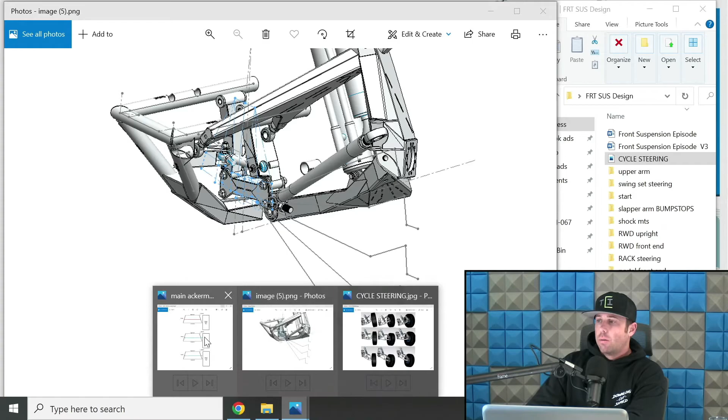And with doing so, I'm skipping a lot of steps. So with a rack-based setup - here's another view angle of it - with a rack-based setup and this sort of swinger setup, we kind of start in the same direction. Let's focus on head-on, where we're starting. We're still going to kind of come back to this initially, like you would. Pick your flavor, even though it's steering swingers on the interior side, kind of get it moving in a forward-looking direction as best you can first, right?

If you're doing it in a direction that we're not doing it, so to speak, if you don't have the same sort of setup we have in SolidWorks, then what's going to happen is you kind of got to do it by hand. So you're going to get it going in a straight direction first, and then focus on the through-turn travel. Now, I can't simply just tell you what to do with the swingers and measurements because these are all going to be different. But what I can tell you is the best advice that was given to me a long time ago, especially when it came to this.

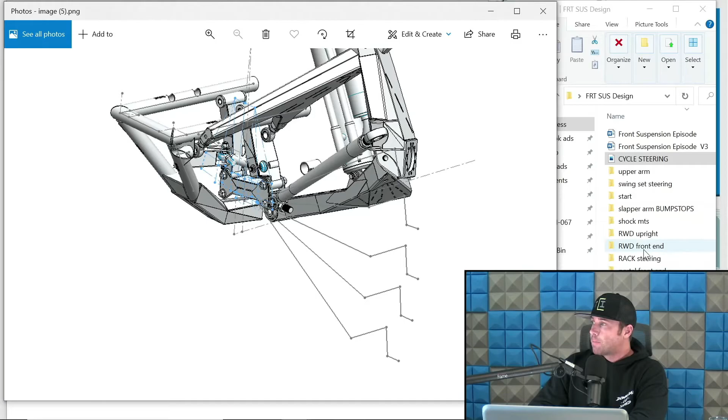Is very simple: put in the fucking work. And when I say put in the work, this is what I mean - I will show you right now. Rack steering, swing set steering, right here.

Map every single thing you change. All of it.

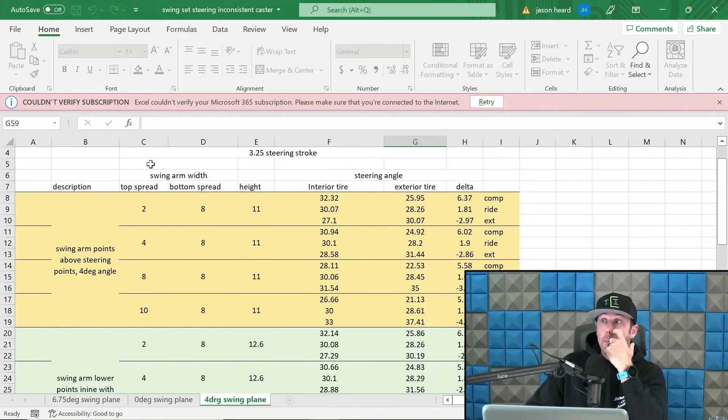And so with that said, here you go: top spread of the swinger, bottom spread of the swinger, height of the swinger. Here's degrees, interior tire, steering angle, exterior tire, here's our delta, etc.

Start mapping it through all this different shit. You will start to see the patterns emerge. I'm not going to tell you where the patterns are—that's some secret sauce that I feel like you can figure out on your own by simply doing this. Start mapping it, start moving this shit around.

Here's a good example: swing arm lower points inline with steering points, 4-degree angle, 2 inches top spread, 8 inches bottom spread. That is this measurement here—2 inches apart here, 8 inches apart here—with a 12.6-inch height on the swinger.

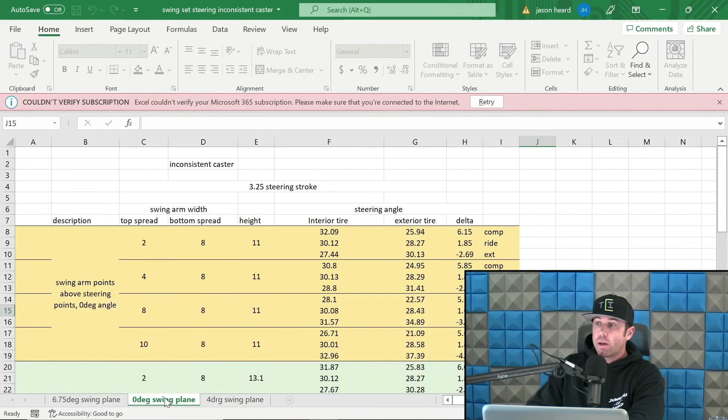And here's our steering numbers, here's our deltas. Again, you will start to see patterns emerge, and just keep going. Once you start to understand where things are going, you can start— here's a 0-degree swing plane.

This is what you've got to do: put in the work. There's no easy street to this. You just got to start mapping it, and you got to start doing it in a fashion that you understand. I felt like this is a good fashion, so go ahead and copy this format—I don't give a shit, because this is not the secret sauce.

This is hard work—hours and hours in the computer cycling and mapping this out, even with our SolidWorks-based program. Putting in the work is going to get you to where you need to be to understand what these changes and movements do. It'll help you understand what the length and width of the swingers do to all this fuckery out here at the tire.

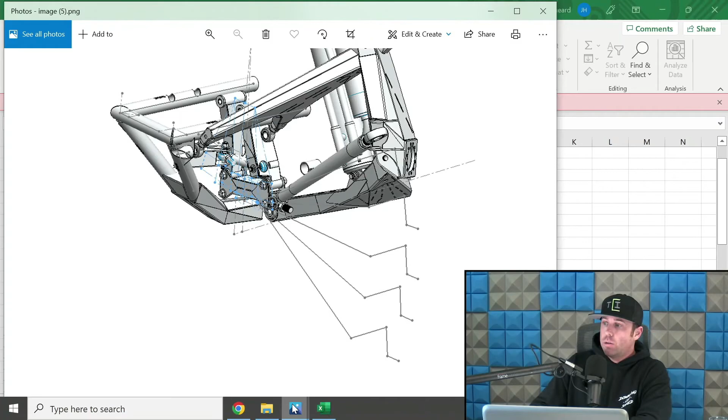So all of those things are not able to be adjusted in a steering rack. These are the degrees of freedom we get to open up and mess with in a steering swinger setup. It becomes far more complex, but that complexity allows us to dictate through turn how we want that tire to behave, compared to a steering rack setup.

So if you want to put in the time to do that, you totally can. Just like I was showing you, start mapping this shit out—be the goddamn monkey, throw darts at it, put that into an Excel spreadsheet, see what happens, move points, see what happens, until next thing you know you've got a spreadsheet where you can start viewing all the deltas.

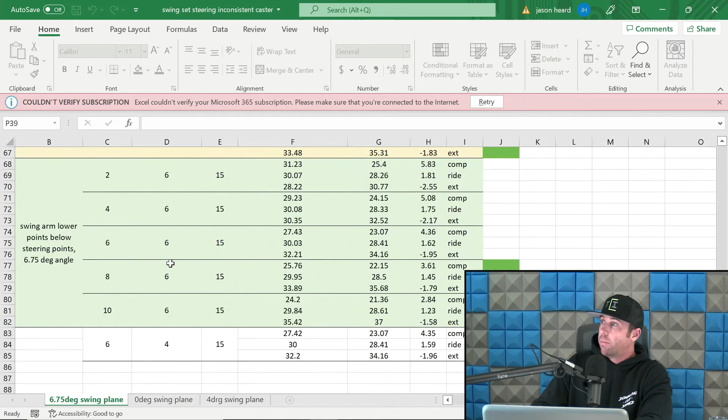I think we may have just accidentally showed something I shouldn't have. We're not going to show that.

I don't want you guys to know the specifics on some of this. I've got to keep some of the secret sauce close to the hip with these more complex assemblies. But I'm by no means a rocket scientist. There are plenty of other smart guys who understand this and can do it too. I'm not the only one. But if you don't put in the work, you're not going to understand it in detail enough to legitimately do this.

When you start to map this stuff out, you're going to notice these trends. Like I was saying, parallel swingers is one trend you'll notice real quick that's not kosher. So if your swingers are parallel, you're definitely not going to want to keep going with that design.

Let's see where we're at. Steering box, adjust with different changes to the swinger's location on the upright. I like to bring this down because I can bring the pivot much further lower in the chassis, so I can bring it lower on the upright and get it closer to the wheel center line for better leverage. So that's what I prefer. Some people could argue with me on that, but that's just a preference of mine.

Now desired turn radius, leverage arm ratio—that stuff still applies with the swinger setup. The distance from this point to the center of the upright, that arm, is going to dictate the leverage ratio with turning as well.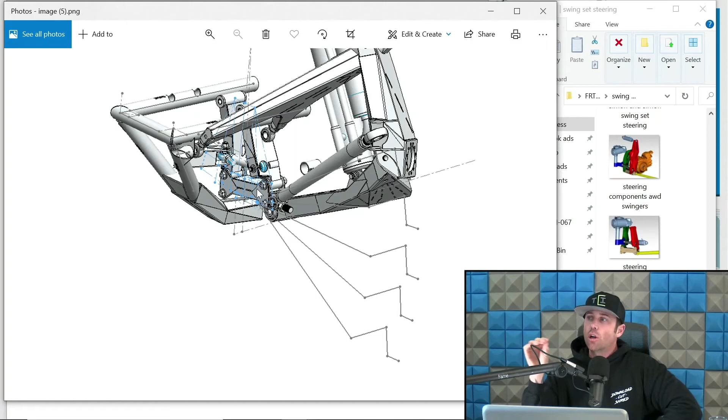The other thing too is on these steering racks, a 6-inch throw is standard for a trophy truck. On these you could go like a 7-inch throw with your center link. I have done that to get a little bit more throw. What that allows me to do is keep the same amount of steering but have a longer leverage arm on the upright.

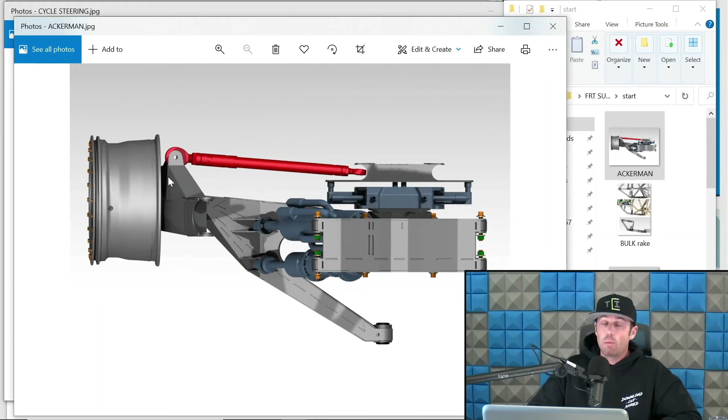That's not a good picture. I can end up with a longer arm here with a steering swinger setup because I can move this to a 7-inch throw. Make sense? Having a little bit better ratio, in essence, will provide a little bit more robustness to the system. So there are reasons why a steering swinger setup can end up being more robust, inherently or by accident, with that type of stuff.

Okay, cool. The other thing too is the rack is set to a ratio that the rack is designed for. In a steering swinger setup, we can manipulate the pitman arm and this guy as well.

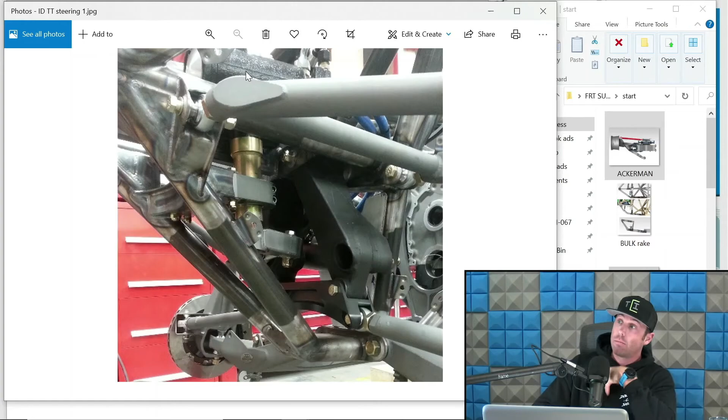This is a traditional Saginaw box. This is not—this is an older picture. This is an ID Designs truck. Dave, fucking rad—this guy is arguably one of the smartest guys in our industry. If you ever get the pleasure of speaking to him, definitely do so. If you ever get the pleasure of looking at some of his trucks, definitely do so. It's rad, man, you can totally geek out.

But the point here is he's similar in the same fashion I like. I do like this lower in the chassis. This is our center link pivot. He does like his swingers at that angle—they are non-parallel swingers. He does like that lower down on the upright. This is a long sector shaft Saginaw box, more of a traditional one like you'd find at Howe, etc. The more modern trucks are running the PSS billet boxes.

But let's focus on this pitman arm. So this is the pitman arm right there. Let's see if I have a picture of one of mine. Here's a pitman arm right here.

You have the ability to change the length of this pitman arm, which will change the tightness of the steering. It won't change the movement of this, per se, because you're still going to maintain your center link to a certain throw you design into the system. If I design this point to move 7 inches of throw, 3.5 per side, I'm not going to randomly start changing it with this. What you can do is use this length and the ratio in the box to manipulate how quickly it turns relative to steering wheel turning.

So you can use that ratio on that side of the table. You don't want to necessarily use that ratio to change the throw. You want to design the throw into the system first, and then design the throw to match your ram, because your ram's going to have a throw that may not match the throw of the steering linkage.

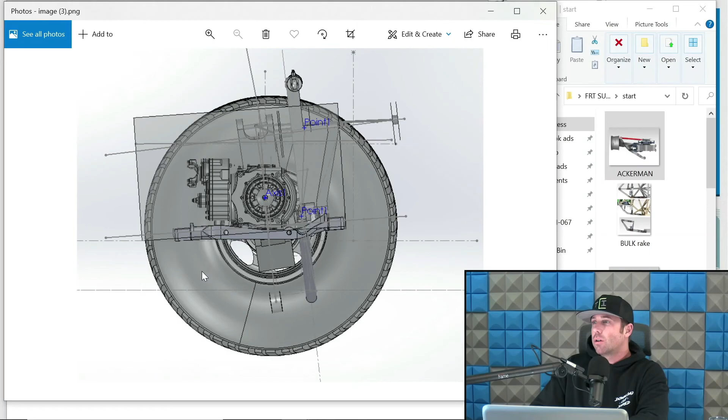I'll get into those later on, but the ID one looks like he's a little shorter, so his, in theory, is turning a little quicker. So the ratio relative to the gear set in here and him may actually be the same as that Power PSS one and that pitman arm I have down there. It could be possible because, again, you're playing with two different ratios. So you've got to keep that in mind and make sure you calculate accordingly for that.

Again, same thing here, the throw of this guy right here is going to be more than the ram. We do use Dave's rams. I like his rams a lot, they're very robust. So in a lot of the steering swinger setups, I do opt for Dave's rams.

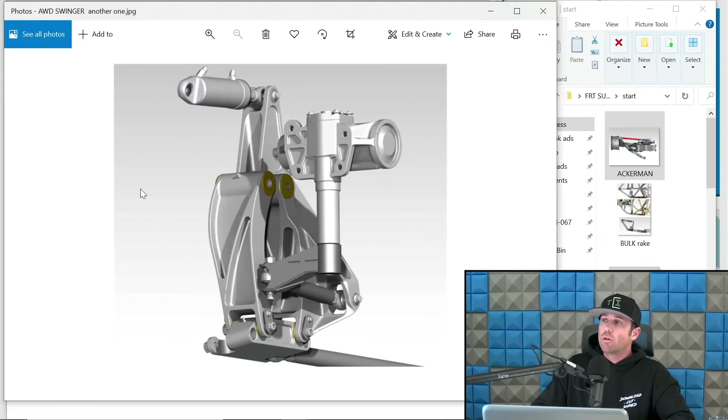And as far as the, so here's another version, here's another pitman arm deal. Again, if I wanted to change or quicken this up, I can shorten this ratio a little bit. This one, we have the ram up top because this is for an all-wheel drive that has a differential right here, and here's our steering nice and low in this thing.

This is another view of the steering system in the all-wheel drive. Our center link is here, swinger - again, you can see I have non-parallel swingers. You're going to notice a pattern, every time I'm doing this, we're doing non-parallel swingers for sure.

Yeah, so swinger setups with inconsistent and consistent caster. So when I'm designing the swinger setups, the swinger plane, so to speak, I match that to the upper arm. I find that to be the most comfortable with getting my other calculations in place. So if it's consistent caster, what that means is it's going to be parallel to the lower arm too.

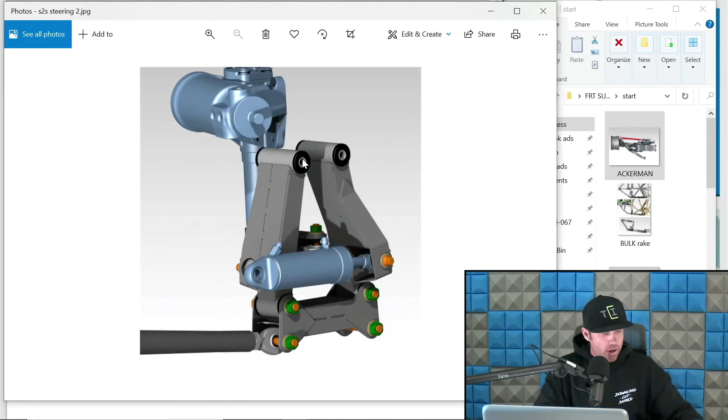If it's inconsistent caster, or what some call caster gain or anti-dive, I like to match the plane of the swingers with the plane of the upper arm. Typically, when we start mapping that out in our spreadsheets, I find that to be a little bit of a smoother arc, relatively speaking, to an inconsistent caster setup. So that's just something to touch upon right there, and that's the plane of our swingers.

So let me, I need to find a bulkhead to show you that. Hold, please. This will work for that example.

So this is a bulkhead that's at 4 degrees of rake, but it's consistent caster. So this upper arm pivot - here's upper arm pivot right here, here's the upper arm pivot right there - actually matches the lower arm, they're parallel. The swingers mount kind of hard, but they mount behind this tube. They're in there, and they mount in plane, so they're on the same plane as the upper arm.

That's what I'm referring to. I want to keep my swinger plane matching the upper arm. I keep my pitman arm matching it too. So all of these are perpendicular and parallel to each other in the chassis. So if I go inconsistent caster, then yes, I would be leaning that more, so to speak.

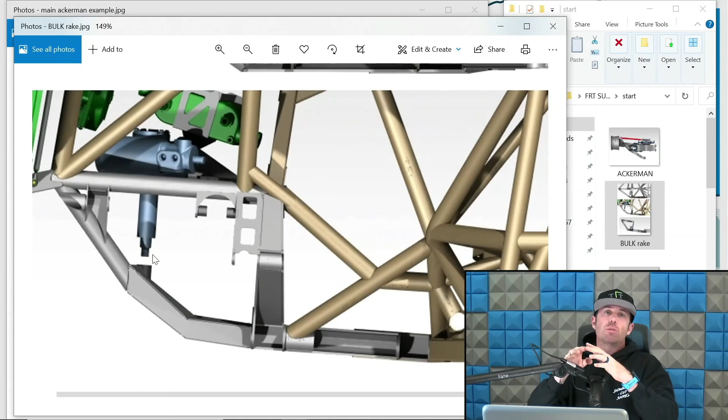Someone could bitch that this guy's going to be pointing downward. The reason I want him perfectly perpendicular to the swinger is because if he's not, as the pitman arm moves, it'll change height in the chassis, and that'll start fucking with the ratio you have for turning tightness relative to the ratio in the box and the pitman arm length. It just adds another variable to the equation.

If this guy is parallel to the ground, and this is at 4 degrees of rake, then that pitman arm is kicked at 4 degrees relative to my swinger. So as the pitman arm moves in the chassis, the height changes, and that ever so slightly changes the ratio.

In other words, it will speed up and slow down the steering quickness, so you have to factor that into the equation. Your steering quickness is going to be a factor of the pitman arm relative to the gear set in the steering box, at least how I like to design these, when you make sure the steering box is perpendicular to your swinger. If the steering box is not perpendicular to the swinger, you just added a third variable into the equation for calculating steering quickness. So I like to keep them perpendicular. Simplify the complex.

Parallel swinger, yeah, I went through that already. I hammered through that.

Vertical versus horizontal swingers. The main thing here is horizontal swingers suck balls. You're basically introducing a fuckload of inconsistent Ackerman. You can dial the Ackerman appropriately with that, but if it's horizontal in the chassis as opposed to swinging vertical, it just creates a whole other headache of issues with the Ackerman mitigation stuff.

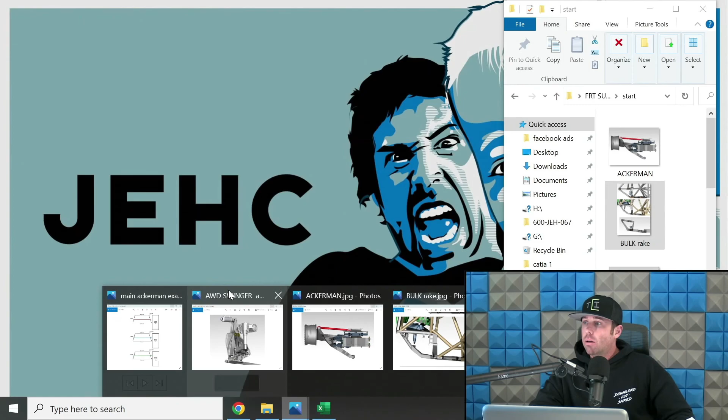Various steering box options, Rams. For me, Power Steering Solutions - this one pictured here is a Power Steering Solutions billet box. I have reviewed that and others. That's my personal favorite. And then this ID truck that I showed, all-wheel drive swinger.

This is a more traditional Saginaw box with a long sector shaft. These are rebuilt to be more robust, and to be fair, a lot of trucks have run these without complications for many years. It's just that new one from Charlie, the PSS one, is more robust, a bit more refined, and runs better internals. So for obvious reasons the guys now are switching over to that, and he's the only one I know making it - Power Steering Solutions.

This is probably like a Howe setup, would be my guess - this might be one from Charlie. But this ID truck is older, so when Dave built and designed this truck, there was no Power Steering Solutions long sector shaft box available. So just so you know, that's it. And as far as Rams go, Howe does make long sector shaft stuff too, I believe - you could totally call them.

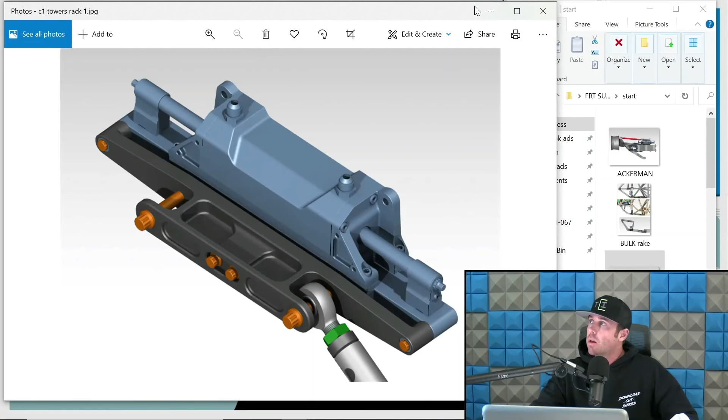The Rams are there to provide the power, so to speak. Just like a rack has the ram built in - on top of the rack you'll see the ram move back and forth - in a steering swinger system, the ram is external. So the ram is this top section in a steering rack; in a steering swinger, it's outside of it. So here is our ram.

This is the ID Designs ram. I do believe he makes the nicest rams, so we obviously set customers up with that first and foremost, although Howe does make a nice ram too. On this setup, the ram is up above for packaging constraints.

And I did this for a reason. In all-wheel drive trucks, you lose approach angle and approach clearance because you're shoving a lot of this stuff forward relative to a rear-wheel drive truck. So in an effort to maximize that, we not only stuff the steering down in this corner, which helps with my preference on the Ackerman stuff, but I also shove the ram up top so the leverage ratio matches our throw.

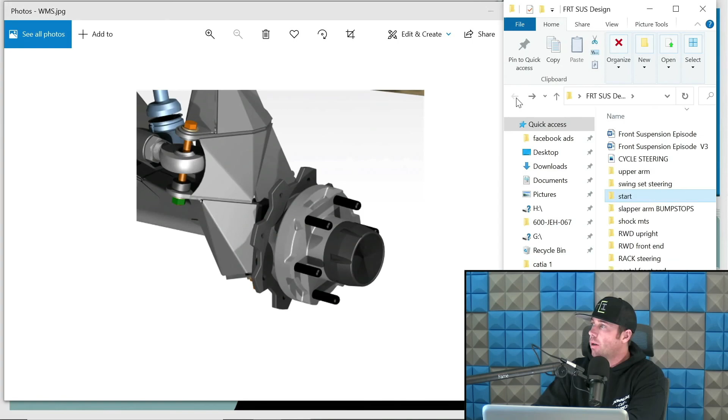But the ram is what provides the oomph for this swinger system, so the box itself is not taking the force. The box is simply providing direction, and the ram is providing the force. In this setup, you can barely see it, but the ram is tucked behind here and bolts right there.

And this is ID's setup. In this one, you can see this is a Mason, the ram is just right in front, and this is an all-wheel drive as well.

This is kind of what I was referring to, on the all-wheel drives this whole chunk of the chassis, the lower arm pivot, has to come up forward here. So in that one I was just showing you, I tried to mitigate and get more clearance for our client by optimizing some of this stuff, throwing the ram back there, moving it over, getting this center link into that pocket below the diff, and moving the lower arm over in that area. So just different strokes for different folks.

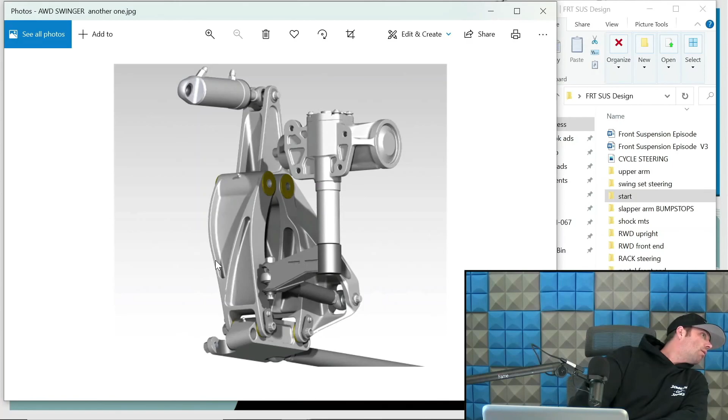Mason has done a great job, they are doing fantastic right now, let's see at the 500. Well, they just keep showing in-car Brandon Walsh. So whatever, but so yeah, this is what I did on that one to help get some more clearance, and that's why I put that ram up in that location on this specific all-wheel drive.

Okay, so I feel like we have done a good job of covering steering. Not bad, 2 hours in. God damn it, and I still want to do shocks, vertical and horizontal bearing setups, and arms. Well, let's go for broke.

Okay, so I ended up rambling on for a long time into the shock and other stuff, so we're going to go ahead and cap this episode on the steering stuff because it was already over 2 hours and I don't want this to get too crazy. So volume 3 of the IFS bulkhead stuff is the steering stuff, and then volume 4 we're going to pick back up into shock and bump layouts, vertical and horizontal bearing setups, and a few other caveats. So that was the abrupt stop because I was just going on, and this was going to be into like 4 hours, and I think that's a little excessive for each volume.

So that is a good rundown of both rack and swinger steering stuff, and if you guys have questions or concerns, shoot me an email. Again, there's a lot of stuff that is opinionated, or my thoughts, so it doesn't necessarily mean that what your buddy did or what you're doing is incorrect, and it doesn't necessarily mean I'm incorrect. It's just different strokes for different folks, and a lot of cool stuff that we can manipulate in steering to cater to your client's specifications when it comes to designing these bits.